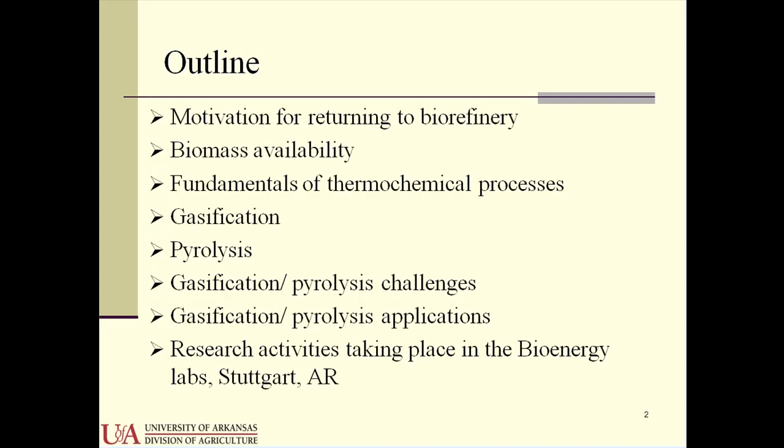The presentation today will cover an introduction about potential bioenergy production via thermochemical conversion processes. I will share with you some thoughts about what's the motivation for returning to biorefinery, what is the biomass availability, fundamentals of thermochemical processes, which include gasification and pyrolysis, and what are the challenges we're facing today for gasification pyrolysis conversion process. Are there any good applications that we can utilize today for gasification and pyrolysis? And I'd like to share with you some research activities taking place in my bioenergy labs in Stuttgart, Arkansas.

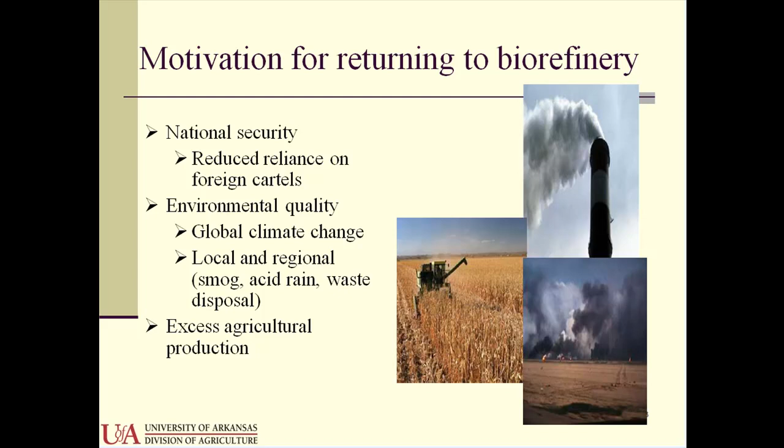As we all know, we have several factors that motivate scientists and industrial partners toward biorefinery from biomass. So what are these factors? They include national security - we need to reduce our dependence on foreign oil. We have some issues with environmental quality, like global climate change or higher temperature, acid rain, waste disposal, and also we have excess agricultural production. So we are trying to utilize all this in terms of energy production - these are the factors that motivate us for biorefinery.

What are some of the energy facts we have? We all know that the United States is the largest consumer of energy use. We are using 105 exajoule. An exajoule is 10 to the power 18, or 100 quadrillion BTUs per year. So we are using 20 million barrels every day of petroleum oil. That means we are using a huge amount of crude oil every day. We are importing almost 60% of this crude oil, as you can see from the line here, that in 2006 we imported 60% of our crude oil.

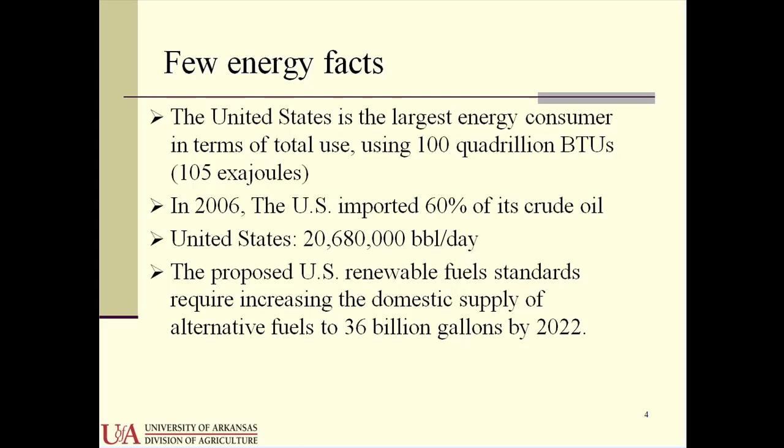The proposed United States renewable fuel standards will require a domestic supply of 36 billion gallons by 2022. And out of this 36 billion, 21 billion gallons must come from advanced biofuel. So how can we fill the gap? We can think about it by utilizing biorenewable resources, such as biomass. We have dedicated energy crops on the right-hand side, agricultural residues in the middle, and we can have traditional crops for producing fuel.

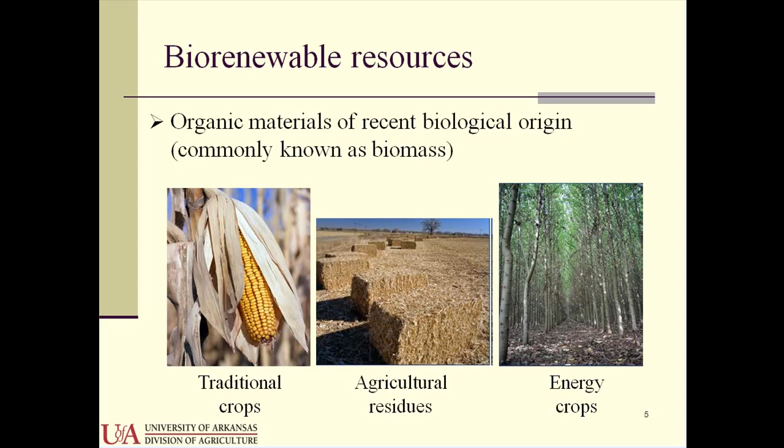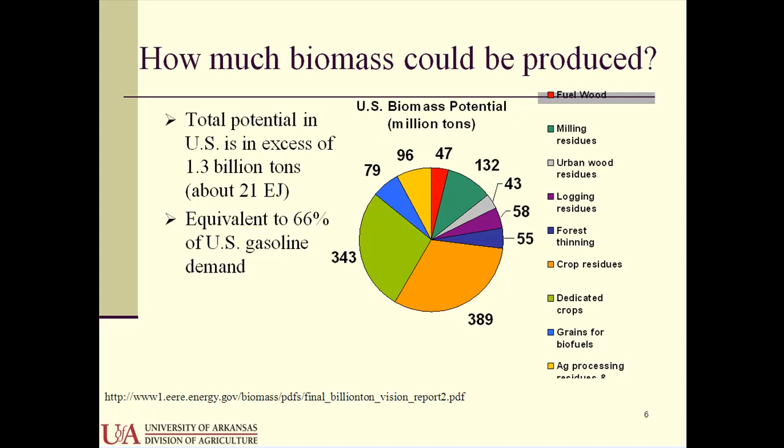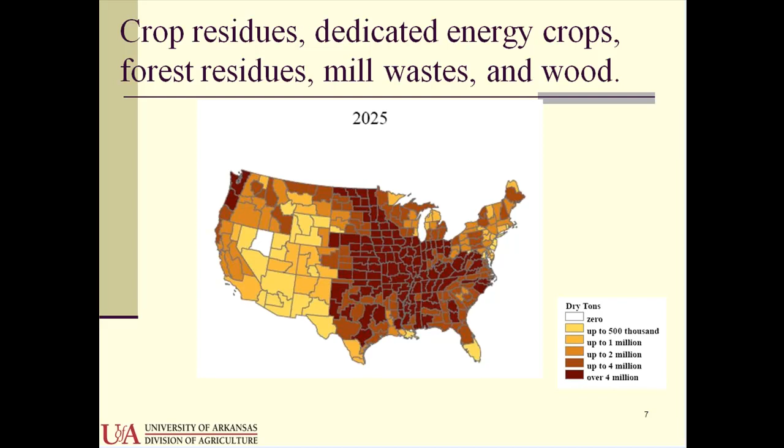Is this biomass available to us that we can use every year? Yes, we have a study by USDA and DOE saying that the total potential excess of biomass production per year can exceed 1.3 billion tons every year. So this can represent 66% of gasoline demand, more than or 2/3 of our gasoline demand can be produced. It is scattered - we have some areas that show concentrated areas of biomass, and we have less areas of biomass, but at least we can think about utilizing crop residues or dedicated energy crops or forest residues and other material for energy conversion.

There is no single energy conversion technology that can work for everything. No, we have several technologies that we can utilize based on the feedstock type. So we can have biological or chemical processes, which include anaerobic digestion and alcoholic fermentation. Each of them can produce a different type of fuel - digestion can produce methane, fermentation can produce ethanol, which is alcohol. Our presentation today covers thermochemical conversion technologies, which include combustion, pyrolysis, and gasification. From the name, combustion will give me a heat source, pyrolysis will produce bio-oil, liquid oil, and gasification, from the name, will produce some gaseous fuel.

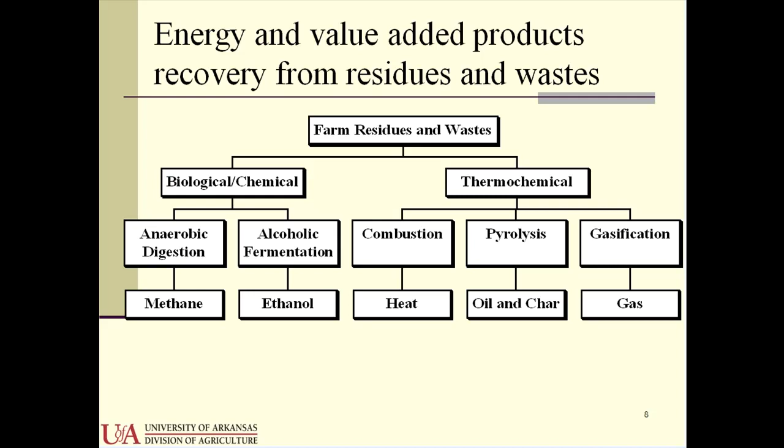We produce this through a technology or process named Biorefinery. It's a process converting biomass to a marketplace product such as biofuel, biopower, or conventional and renewable products. This concept is very similar to what we have in the petroleum refinery process.

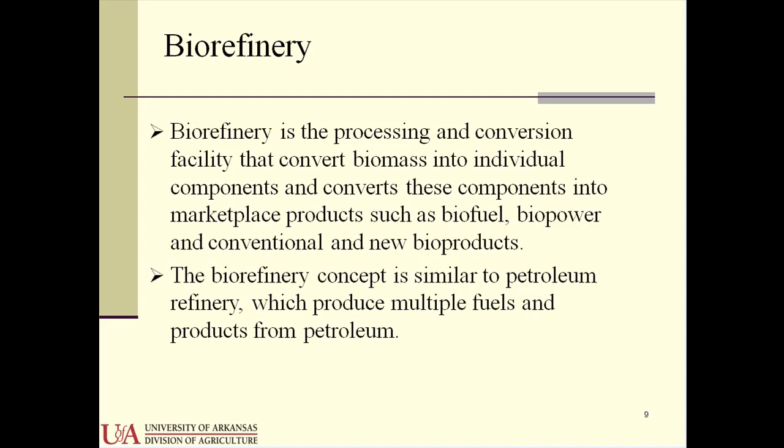We have two major approaches to biorefinery. One is the sugar platform, which utilizes biomass containing sugar, or uses enzymes to convert starch material to sugar, and this sugar can be fermented to ethanol.

Or there's the thermochemical platform, which includes gasification or fast pyrolysis to convert biomass to fuels and chemicals. Sugar platform gained the lion's share previously because many people know how to convert starch or sugar material to alcohol. Thermochemical conversion is starting to gain momentum again, since this technology can easily be applied and can convert many types of biomass to useful fuel.

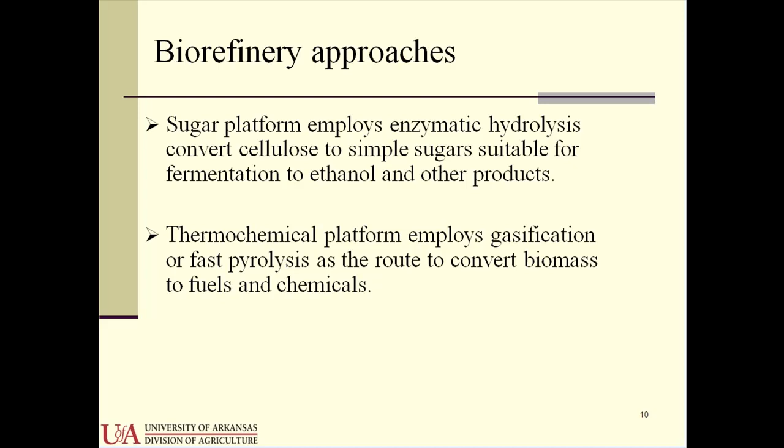As I mentioned, we have direct combustion, thermal gasification, and fast pyrolysis. These are the three major thermochemical conversion processes which we'll cover today.

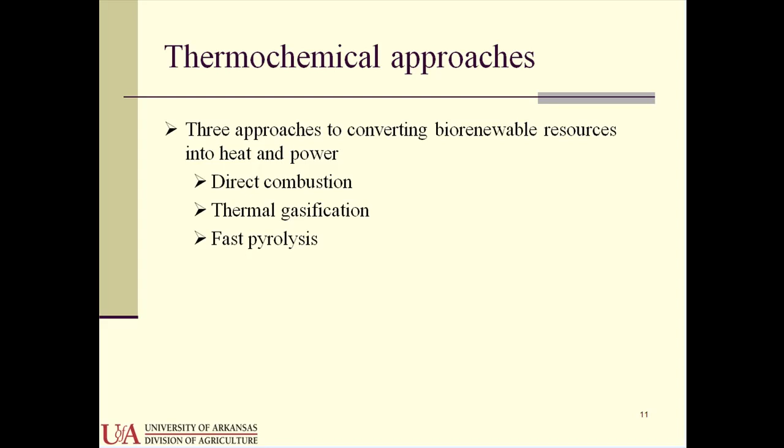Direct combustion is a very old technology. People have known it for many years, and it has many advantages - it's already a commercially available technology, and we can convert many types of dry feedstock to heat. We can burn the material in an excess environment of oxygen and produce heat. We have to utilize this heat, and that's one of the disadvantages - we have to utilize the heat in situ.

Some other disadvantages of direct combustion include penalties related to high moisture content fuel, because moisture content needs to be driven off first before you can start burning the material. We also have agglomeration, meaning particles in the reactor can fuse together and make one piece of particle that can affect the grate of the reactor. This can come from the alkali we have in the biomass, so we call it agglomeration or ash fouling in the reactor.

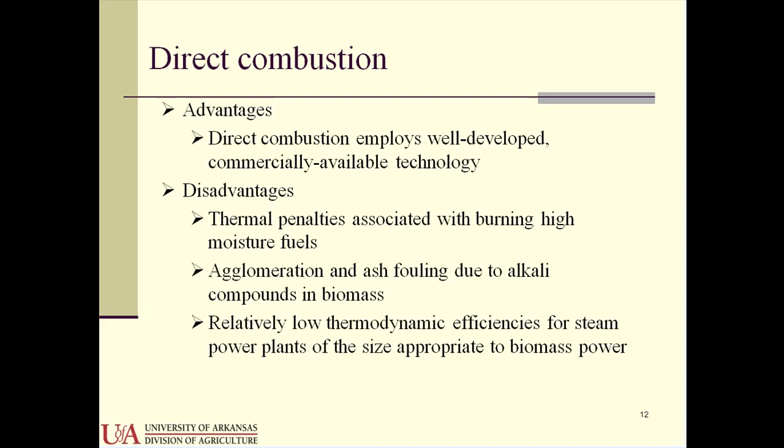We have relatively low thermodynamic efficiency for combustion compared to other thermochemical conversion processes. One of the major topics for our talk today is gasification. So we talked about direct combustion, and now we're talking about gasification.

What is gasification? It's still a thermochemical process working under 1000 degrees centigrade. We expose the biomass to about 1000 degrees centigrade, and we introduce less amount of oxygen than what we need for complete combustion, for burning. We introduce less oxygen to convert our carbonaceous material to gas, not gasoline, to gas. This gas includes carbon dioxide, carbon monoxide, hydrogen, methane, hydrocarbons, tar, and char.

This is a major chemical reaction for the gasification process. I'll mention here that once gasification is started and reaches steady state, it can be a self-sustained process. What do I mean by self-sustained? It can produce some heat required to gasify the remaining material, so we don't need to add an external heat source all the time. We need to start the process, and then once it's in steady-state mode, it will be self-sustained.

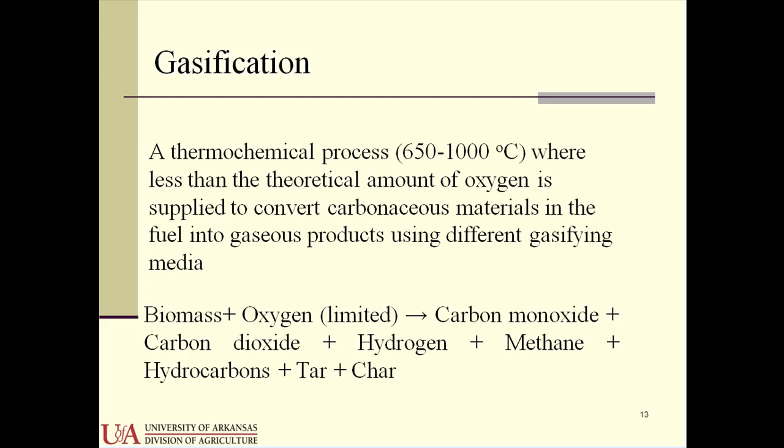What are the fundamentals of the gasification process? First, if I introduce moist material with moisture content maybe in the range of 20% or 15%, when I expose this biomass, a piece of wood, to heat, the moisture will be released, driven off. Then, second step, the porosity of this biomass will increase because volatile matter and gases will be released, increasing the porosity of the biomass.

This volatile matter includes carbon monoxide, carbon dioxide, hydrogen, water vapor, and some light hydrocarbons and tar. These gases, when they find the environment required for chemical reaction, will react together, producing more carbon monoxide or hydrogen. It depends on the environment in terms of temperature, pressure, existence of catalyst, or other factors. On the right-hand side you can see the rectangle showing endothermic reactions and exothermic reactions.

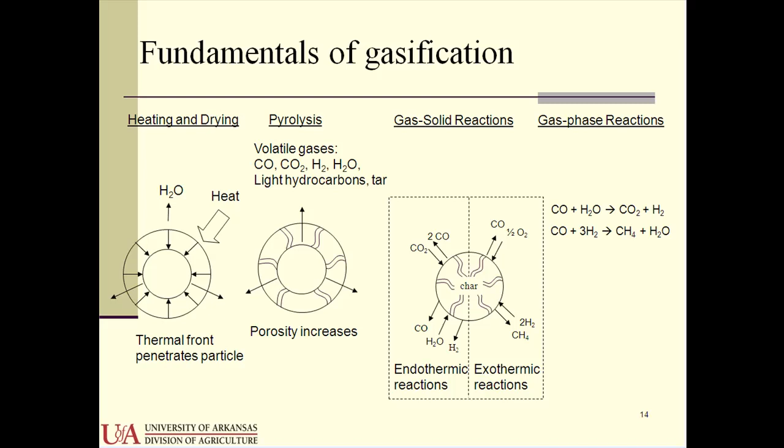What does this terminology mean? Endothermic reactions mean some of the reactions require heat. Other reactions are exothermic, meaning they release heat. Engineering adjustment will make the required heat equivalent to the released heat, and then the process will be self-sustained. That's the main idea behind the gasification process. So I can start my reactor, and then it will become self-sustained.

So based on that, what are the common types of gasifiers or reactors? We have about three different common types of reactors.

From the left-hand side, you can see what we call updraft, and the middle one is a downdraft. On the right-hand side, you can see a fluidized bed.

The updraft and downdraft share that I'm introducing my biomass from top to bottom. In the updraft gasifier, I'm introducing the oxidant from the bottom to top, going upward. In the downdraft gasifier, I'm introducing the oxidant in the center, and the gas will be produced at the bottom.

So we are producing producer gas or syngas. I will explain the difference between them now. And we are producing char, and we are producing tar. On the right-hand side, you will find a fluidized bed.

Fluidized means that we are imitating what happens with fluid. The bed contains sand, as you can see in the shadow area. Because we introduce oxidant, air, or any other gasifying media from the bottom, the sand will be lifted up and down many times, which will increase the heat and mass transfer rate.

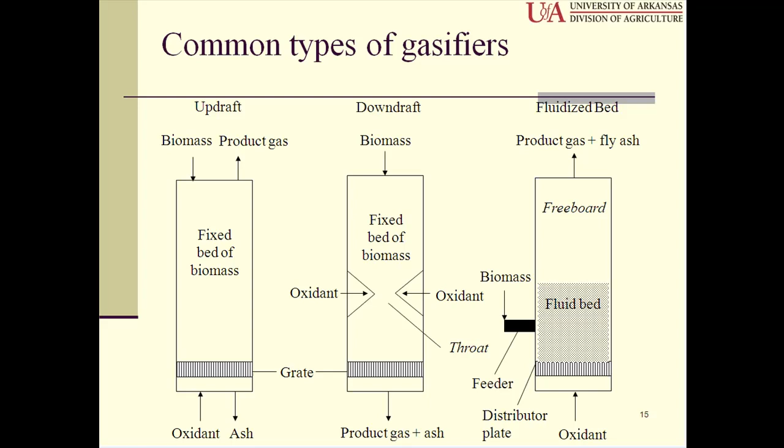If I'm introducing the biomass from a horizontal auger, the biomass instantaneously will be converted to gas, volatiles, char, and tar. Because we have sand in the reactor, it helps increase the heat and mass transfer rate, and also works as a heat sink, which can contain some of the energy to convert more biomass to gas.

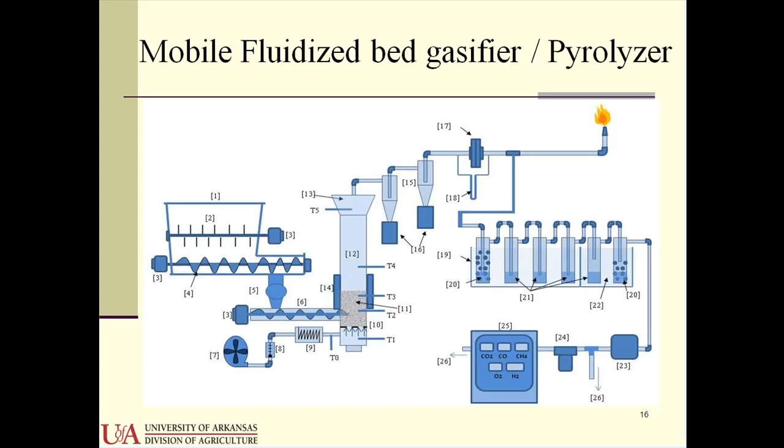Gasification efficiency is a little bit higher than combustion efficiency because we are taking the biomass at a lower temperature and with a lower oxygen environment, and this can produce higher efficiency for the gasification process. We can expect 90% efficiency based on high pressure and high temperature gasifiers, and 70 to 80% efficiency from typical air-blown gasifiers.

We are measuring the efficiency in a different way by cold gas efficiency, which is the energy in the gas divided by the energy in the biomass. This can be in the range of 50 to 70% for cold gas efficiency. So we can measure the efficiency in two different ways.

The first is the chemical energy of the solid fuel compared to the energy in the gas, and also the sensible heat. In thermal efficiency, we take the sensible heat into account. In cold gas efficiency, we take only the energy in the gas. So we have two different ways to measure the efficiency of a gasifier.

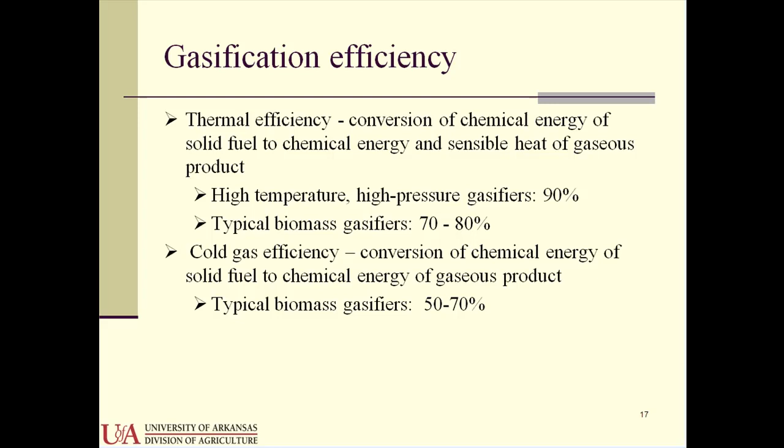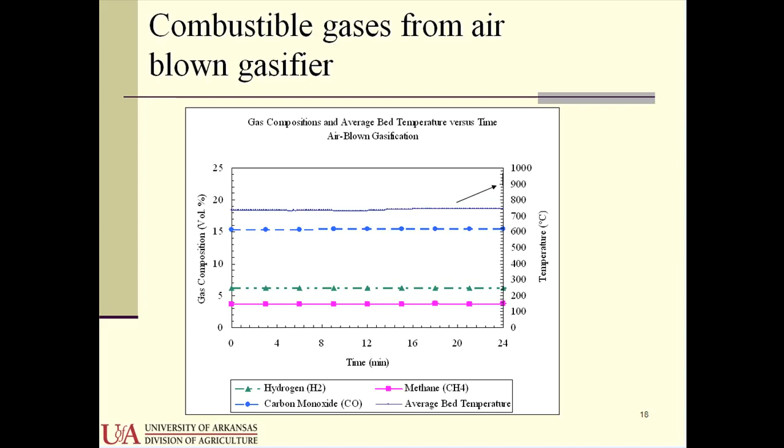If I'm introducing air, I can expect 50% of my producer gas to come as nitrogen, which leads me to say that the gasifying media, the gasifying fluid which I'm using, can be air, which certainly will produce nitrogen in my producer gas, or it can be steam.

Steam means that I'm eliminating nitrogen from my producer gas, mainly producing carbon monoxide and hydrogen. That's the main reason many scientists name it syngas, because syngas is the gas containing mainly carbon monoxide and hydrogen. Producer gas is the gas containing all what you can see in the table on our screen.

We can use hydrogen for gasification. We can use only oxygen for gasification.

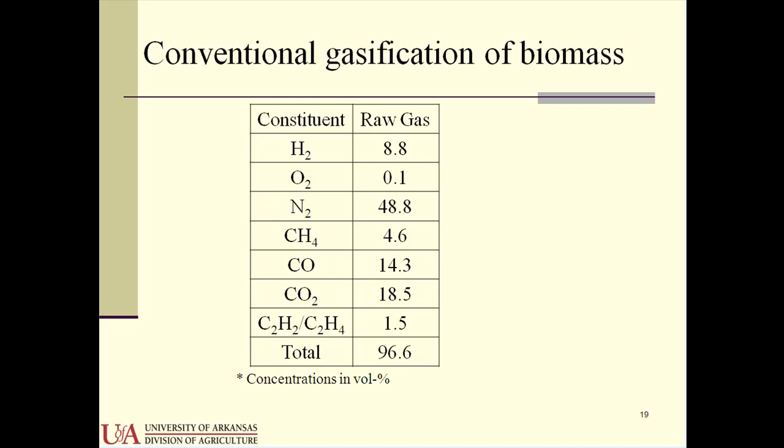These gases can produce higher BTU producer gas, but each has its own disadvantage because of expense, economical ways, or safety issues. So each type of gasifying media can have its own disadvantage, and sometimes we need to introduce or maintain heat if we're using a different type of gasifying media rather than air.

The typical BTU or heating value of the gas is in the range of 5 megajoules per cubic meter. Let me translate this to BTU - I'm expecting the gas to be in the range of 125 BTU per cubic foot. Just to give you a comparison, natural gas is 1,000 BTU per cubic foot. So producer gas will be almost 1/8 the BTU compared to natural gas.

But it's still coming from a renewable source material, from renewable feedstock, such as wheat straw, rice straw, dried animal manure, wood chips, or any other crop residues I can utilize for producing producer gas.

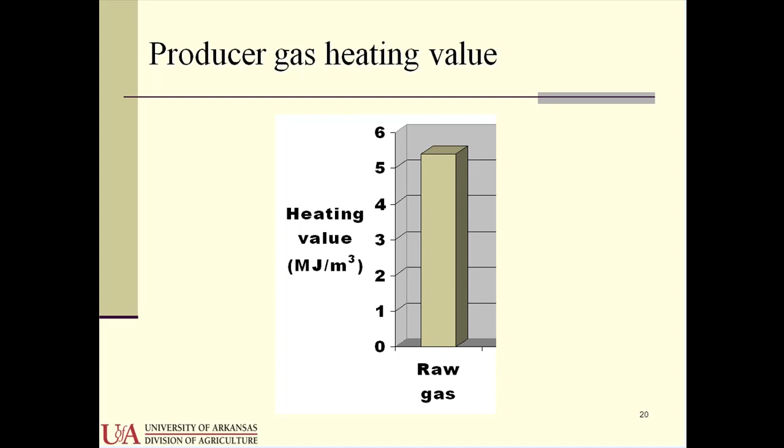We have many potential uses for this producer gas. We can take it downstream and burn it right away to generate electricity, or we can take it downstream and work on the gas with more chemical reaction, or do more biorefinery, to produce either hydrogen, alcohol, or polymers. So we can work downstream of the gasifier to produce more value-added material.

In addition to that, what scientists are currently looking for is to work more upstream of the gasifier to enhance the quality of the biomass, because maybe enhancing the quality of the biomass can reduce the tar production.

Remember, I mentioned that we produce 3 major components from gasification. Number 1 is the gas, which is our target for the gasification process. Number 2 is char. Number 3 is the tar.

Let me start with number 3 now. Tar is a viscous material which I do not like to introduce to an internal combustion engine because of its viscosity. It will affect the internal combustion engine and make it very difficult to keep it running. So we are trying to eliminate or minimize the amount of tar produced downstream.

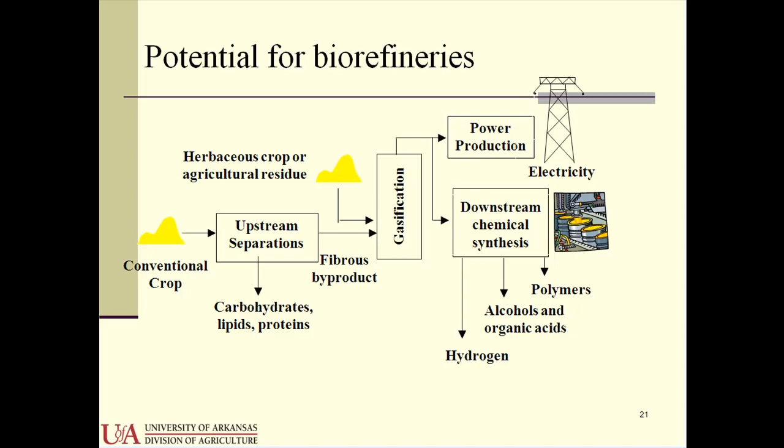And also we are producing a material which we like to eliminate or minimize, which we call tar.

Now we cannot only produce gas, we cannot only generate electricity from syngas, but we can produce more liquid fuel. This technology is not new. Producing methanol from syngas is an old technology. And methanol, the alcohol starting with M, is needed for all biodiesel-making plants. So they need methanol to blend with vegetable oil to make biodiesel.

So we can produce methanol from different types of feedstock that we can gasify, and then downstream we introduce the carbon monoxide and hydrogen - those are the main 2 components of syngas. Then under certain pressure, temperature, and existence of catalyst in a Fischer-Tropsch reactor, we can produce methanol. As I mentioned, it's an old technology.

Another interesting subject - we can produce ethanol. For many years people have succeeded in producing ethanol from corn through the sugar platform, as I mentioned earlier. But now we can take the syngas, mainly hydrogen and carbon monoxide, bubble it through a fermenter, and with the existence of a specially adapted type of microorganism capable of converting syngas to ethanol, they take this syngas, hydrogen and carbon monoxide, combine them together, and produce ethanol.

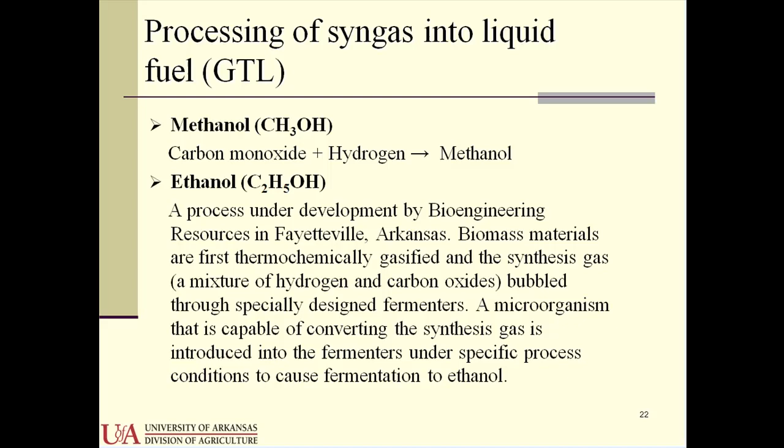So as I mentioned here in my slides, this technology is being developed by a company named BRI, and this company exists in Fayetteville, Arkansas.

I'd like to share with you some of my calculations which I have on some of my fact sheets, which you can find on the University of Arkansas Extension website - if I have 1 acre of wheat land, how many pounds am I expecting from wheat straw, and how can I replace propane with this amount from 1 acre of wheat land.

If I have 1 acre of wheat land, I'm expecting to get about 3,000 pounds of wheat straw. And this will replace, if I convert it to syngas or producer gas, each cubic foot containing 125 BTU, I can replace almost 400 pounds of propane.

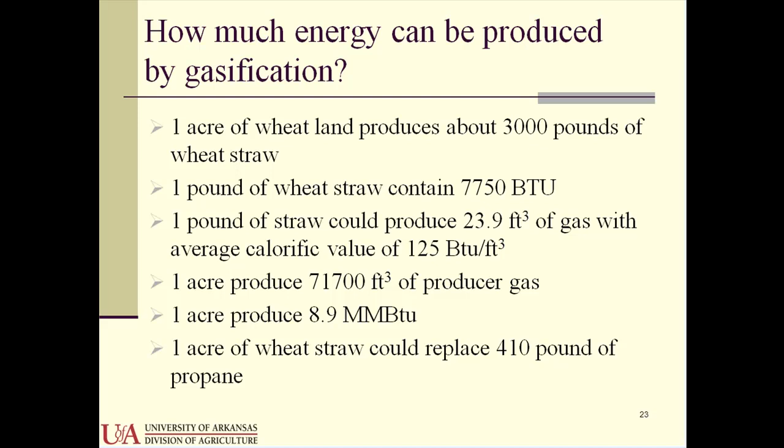I want you to remember this number, because when I go to pyrolysis, you may find a different number, and we will compare these two numbers later. I'm expecting to replace 400 pounds of propane if I'm utilizing crop residues or wheat straw coming from 1 acre of wheat land.

The second technology I'd like to mention today is the fast pyrolysis process. As you can see at the bottom, I have biomass. I like to expose my biomass to a higher temperature, let's say 500 degrees centigrade, compared to gasification, which was almost 1,000 - so it's half the temperature. But I like to apply a high heating rate, almost 1,000 degrees centigrade per minute. So I'm exposing my biomass to a high heat rate and a moderate temperature, and then I'm expecting to have a zero oxygen environment in my reactor.

This will produce 3 major components. Remember, in gasification my target was gas - I'll show you in the next slide what this bio-oil looks like. We are producing char and gas. So if I have 100 pounds of biomass, you expect to produce almost 60 pounds of bio-oil, similar to crude oil, 20 pounds of char, and 20 pounds of gas.

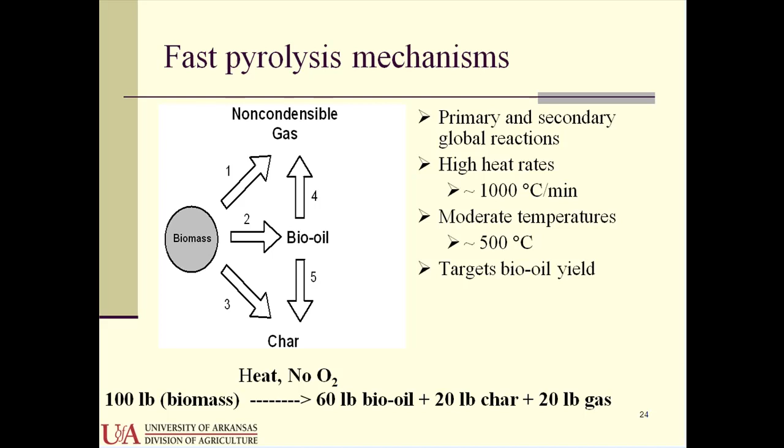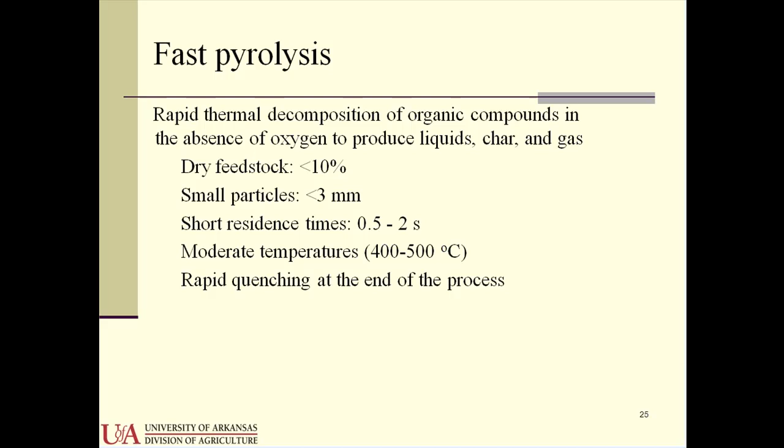The fast pyrolysis process is unlike gasification because I need the feedstock to be more dry - I like the biomass to be less than 10% moisture. In case of gasification, maybe 15-20% will be okay. I need the biomass particle size small, and also very short residence time, almost 0.5 to 2 seconds for my biomass to stay in the pyrolyzer. We need moderate temperature up to 500 degrees centigrade, and certainly I need instantaneous quenching of the vapor to convert it to liquid oil.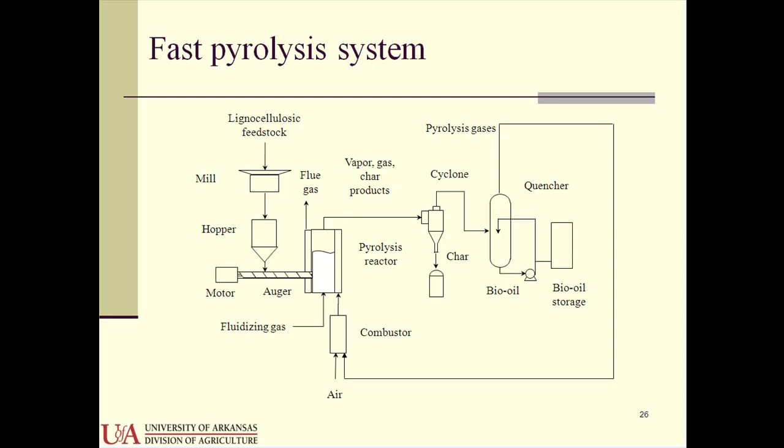Bio-oil is very acidic - the acidity is around 3, which means we have to make sure that when we store it, we use certain types of containers because of this acidity. In terms of BTU, the bio-oil is normally in the range of 11,000 BTU per pound, or maybe 16 to 26 megajoule per kilogram - a little higher than the original biomass. We are not creating energy, but condensing the energy from a solid type of biomass to a liquid, easier to transport and store.

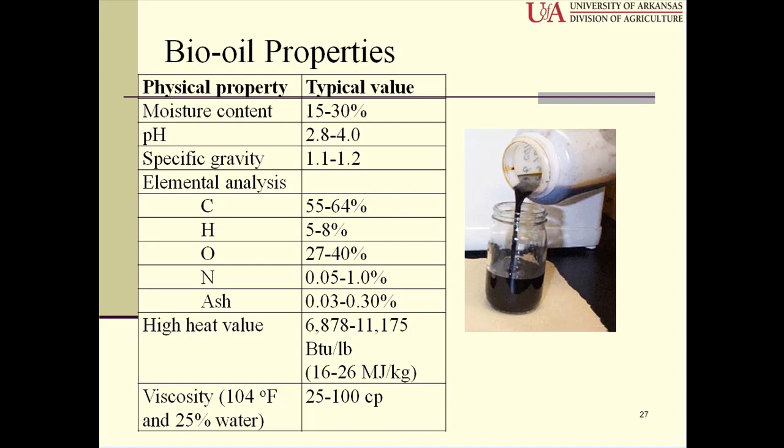We're converting the solid, bulky type of biomass to a more condensed, transportable biomass. How much bio-oil can I produce from wheat straw, similar to what we did before? If I have 1 acre of wheat land, I can still produce about 3,000 pounds of wheat straw - and this will give me about 566 pounds of propane. Previously, we said about 400 pounds of propane can be replaced with the gasification process from the same 1 acre, which produces 3,000 pounds of wheat straw. Why is the difference? Why can pyrolysis oil replace more propane compared to gasification?

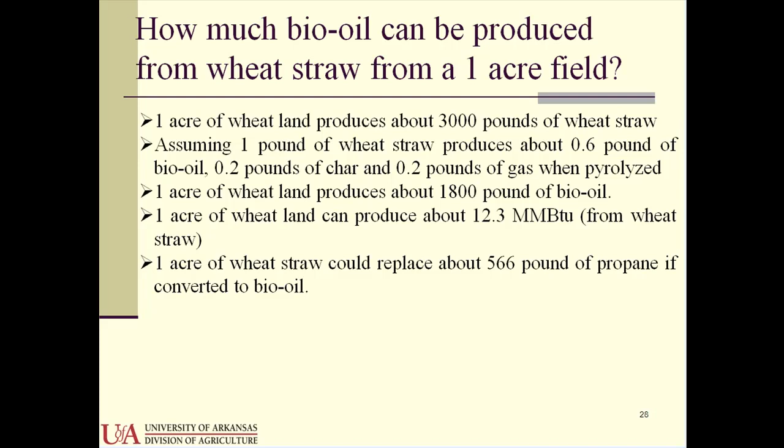In gasification, the process is self-sustained, meaning it consumes some of its own energy to keep running. But in pyrolysis, I am introducing biomass and heat all the time. That shows why we have a higher propane replacement from pyrolysis compared to the 400 pounds propane replacement in the gasification process.

We have to process our biomass. I cannot take large pieces of wood and introduce them to the reactor. We have to make sure it's dry enough and ground enough, chopped enough, to be handled easier for either gasification or pyrolysis.

We are producing ash, tar, and maybe ammonia or sulfur or particulate, and as I mentioned earlier, the BTU of the gas is almost one-eighth of natural gas. So it's still a low BTU gas.

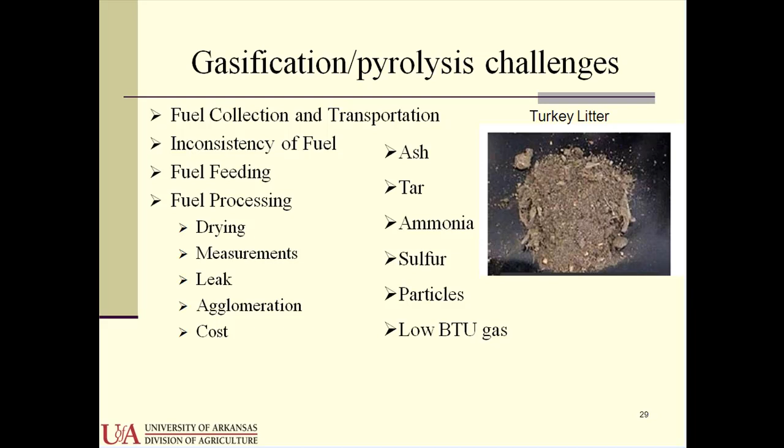But certainly gasification and pyrolysis can utilize a renewable resource, and I can use them for producing gas or bio-oil, which means I can introduce more jobs to our market instead of exporting these jobs overseas. We can build many gasifiers or pyrolyzers and create more jobs domestically.

Gasification can produce near-zero gas air emissions because the temperature we work with in gasification is lower than in combustion, so we are not producing as much or as high a concentration of air emission gases. We don't have to deal with these gases to the same extent as we do in combustion.

The cost of gasification and pyrolysis is now becoming competitive because we have several types of downstream processes which produce more value material, introducing a faster payback for the whole process. So these processes are starting to become economically viable.

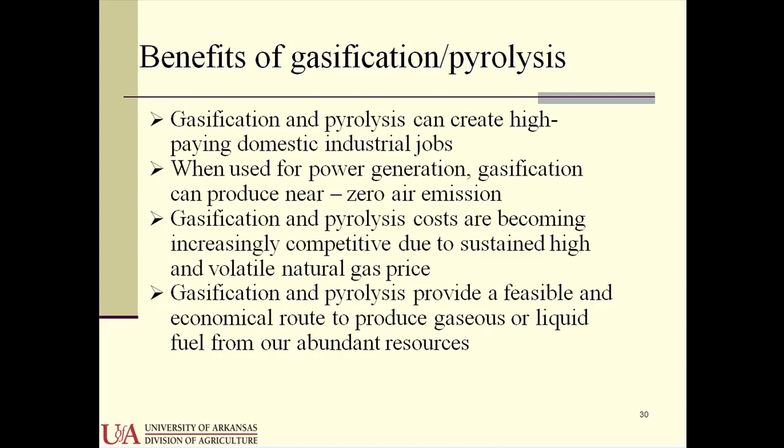So we have the biorefinery approach to convert lignocellulosic biomass to either gas through gasification or to liquid oil through pyrolysis, in addition to the sugar platform. Instead of producing liquid fuel only through the sugar platform, we can also produce liquid fuel ready to go to the tank through thermochemical conversion, working downstream with the gas or the bio-oil.

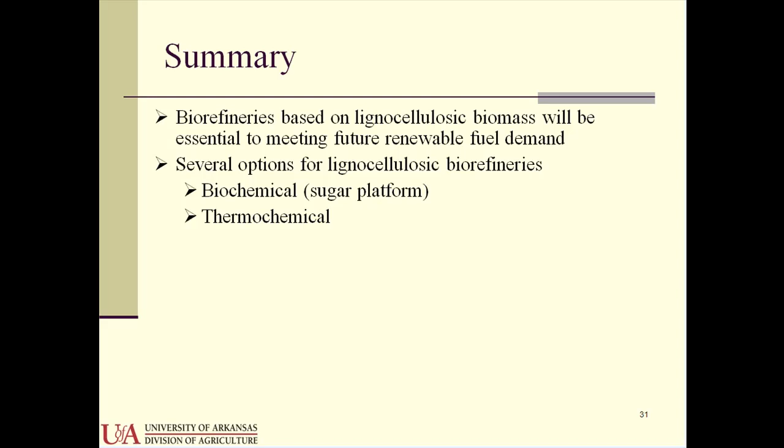Just to share with you some of the work I'm developing in my bioenergy lab in Stuttgart, Arkansas - you're welcome to come visit at any time - I have a mobile pyrolysis gasifier unit based on fluidized bed technology. The main idea of building this unit is that it can be easily moved from the lab to the corner of the farm to convert biomass.

We convert biomass to liquid oil through the pyrolysis process, then store the bio-oil on the farm. Later we can work with the bio-oil, converting it to gas or other types of hydrocarbons, because chemically we can take the bio-oil and do many biorefinery processes similar to what we do with crude petroleum fuel.

So my goal is to take the unit to the farm instead of bringing the biomass to a centralized biorefinery. The main idea is to save transportation cost, and it's a bit easier to handle and transport crude oil or bio-oil than bulky biomass material.

In addition, I'm working downstream on absorbing carbon dioxide. Remember, carbon dioxide contaminates our gas, meaning it lowers the BTU. So I'm trying to absorb the carbon dioxide and also minimize air introduced to the system while maximizing steam. If I maximize steam and minimize air, in other words minimizing nitrogen and absorbing carbon dioxide, I can hopefully reach a medium BTU gas.